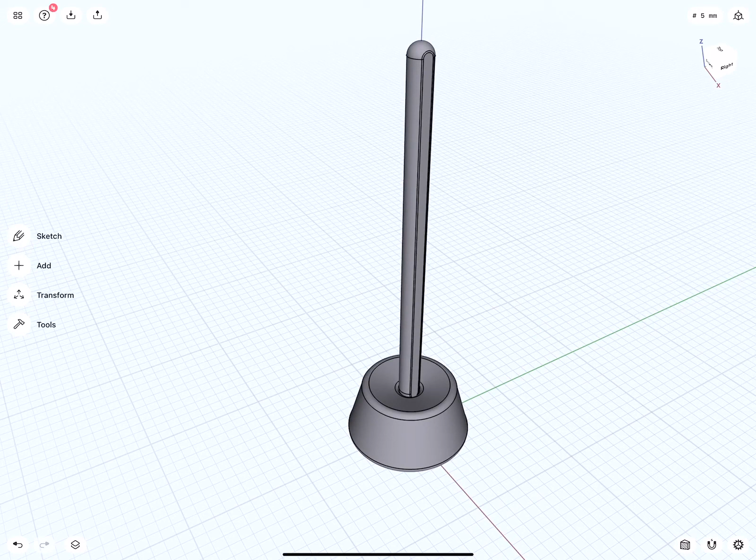Hello everybody and welcome to this tutorial on how to model a stylus and a base in Shapr3D. In this video I will show you how to create everything via minimal sketches, and then add the details only via direct modeling.

Before we get started, let's go to units, set everything to millimeters, and make sure our snapping is all turned on. We can go to the front view, zoom out, center on the grid, and we are ready to get started.

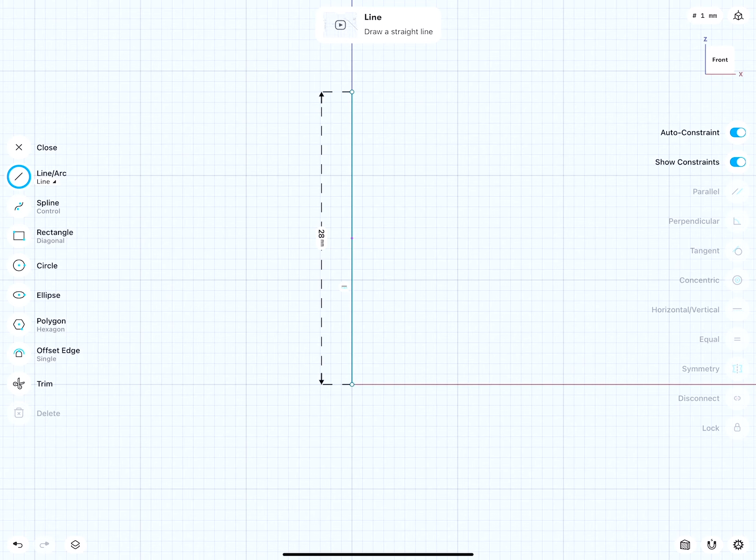Because the pencil will stand inside this holder vertically, it makes sense to start our first sketch in front view. With the pencil from the center of my scene, I will start drawing a line. I have auto constraint turned on, so when I go really horizontal or really vertical, it adds those directional constraints already.

I draw a very incorrect proportion of the shape of this pencil because now I can dimension a few elements and I don't have to scroll so much.

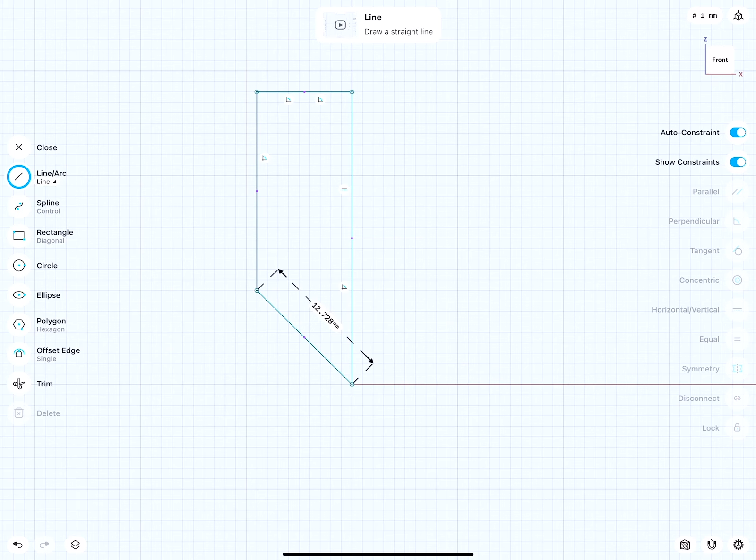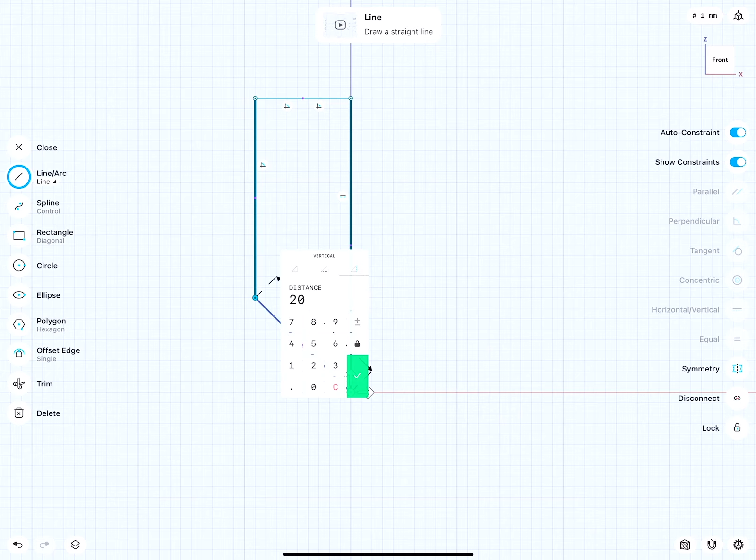So what this means is, first, this point we will lock. I don't want this to move. From here to there, vertically, the distance should be 20 millimeters. You see, there are actually three triangles: diagonal, horizontal, and vertical. There, it's a vertical dimension.

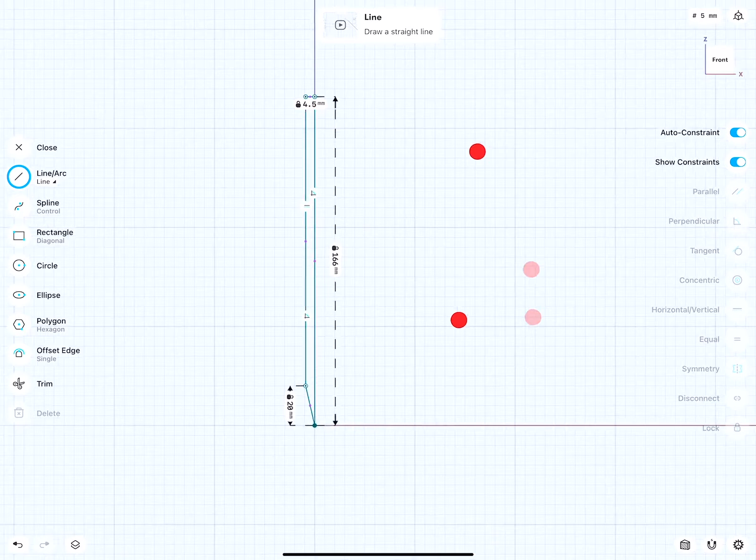The radius is 4.5. And then the length, that is 166. So you see, this way it's a lot easier to lock a lot of dimensions and details into the sketch before we have to zoom and pan a lot.

Very good. So with this very basic sketch, now we can see how this looks when we revolve it 360 degrees. This looks good.

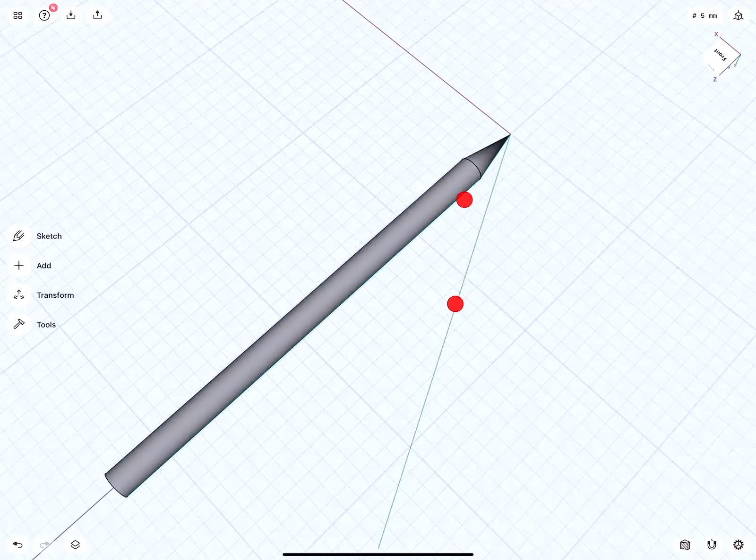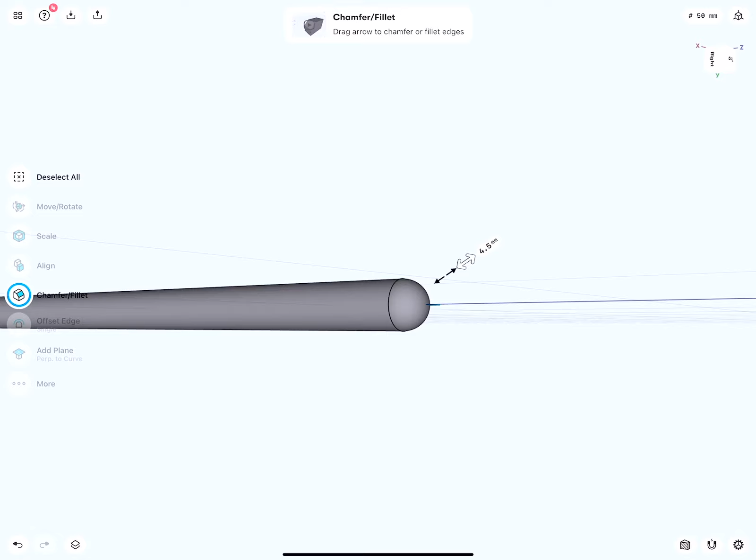This edge we can round by 4.5. Again, the diameter is 9. If I would like to round this into a half dome, it has to be half of the diameter, which is then actually the radius, so 4.5 millimeters.

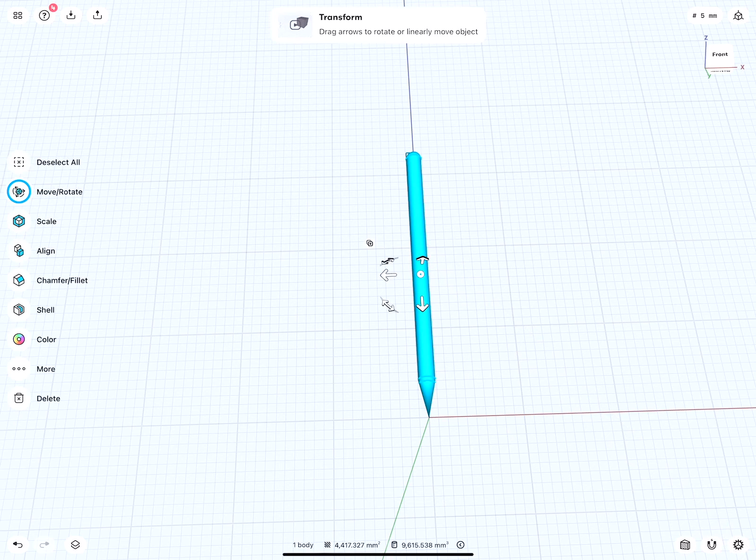Here we can round this by 10 if we would like to—not too small, not too big—but here we have a point, so that's a little bit tricky. That means this approach doesn't work. We have to modify our sketch a little bit.

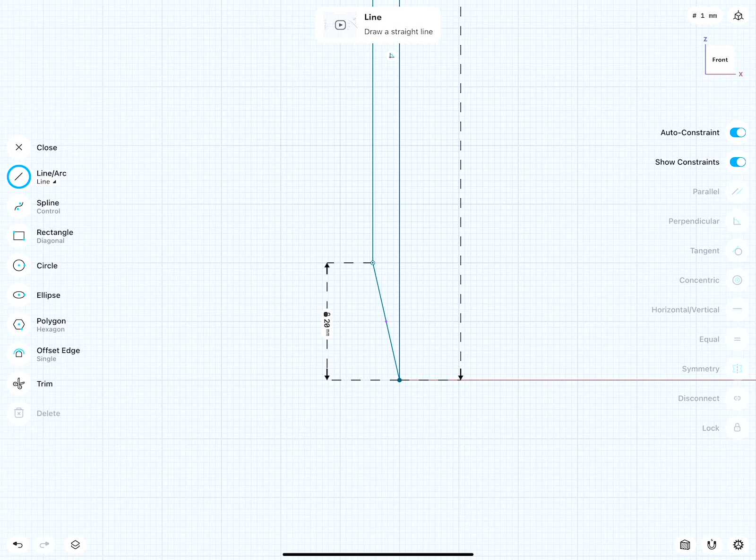Still, the top edge, so this, and then here this point, I keep as they are. Because as you saw, very easily I can add the filleting during modeling, I will keep my sketch as brutally simple as possible.

This line here I will remove and add a new line. Now from this endpoint to here, I would like to add an arc. I can go to arc, draw myself an arc to there. There it is. Very good.

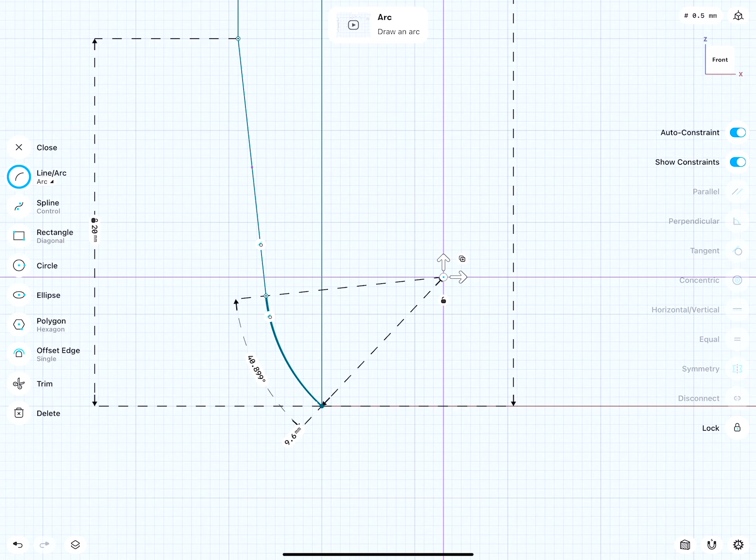The arc to this line already is tangent. If you do not see the tangent constraint, here I will remove this. We can add this here. If we would revolve this, we would have down here a very sharp point.

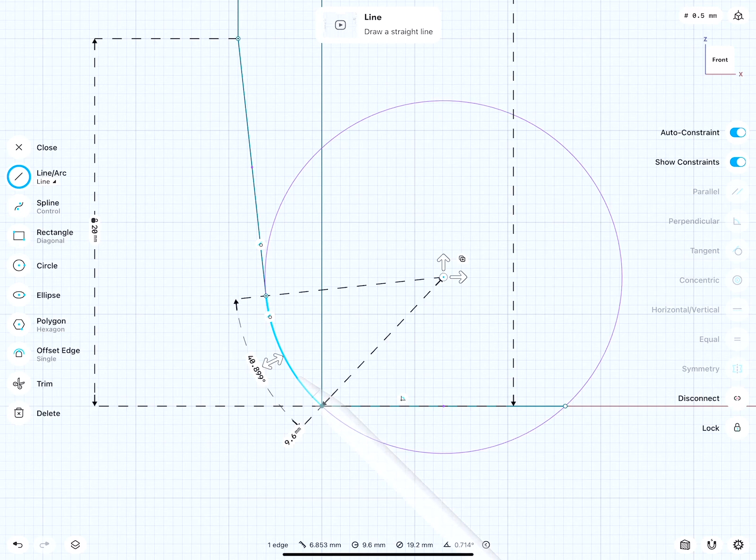How can we fix this? Well, what I want is that when this would be a horizontal line, that this arc runs tangent to there. One very easy way is I simply select this point and then drag it onto this center line here. You see? And 180 degrees.

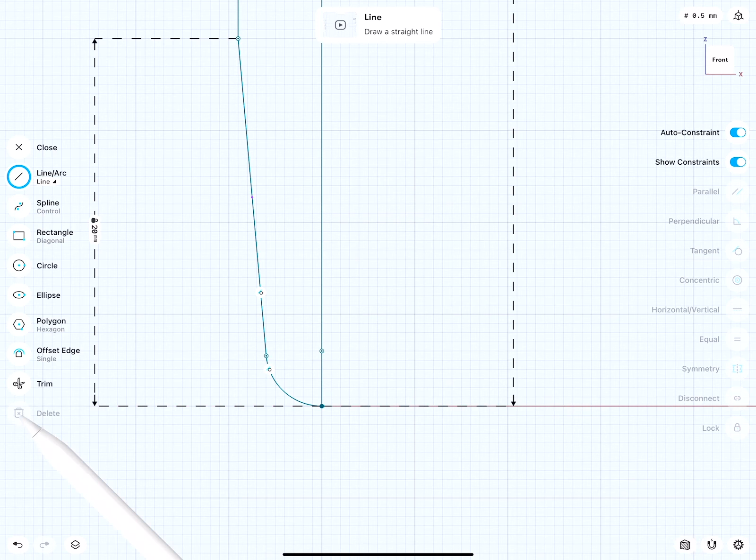So this line now I don't need anymore. And I can give this a dimension—this should be 0.75. The tip has a diameter of around 1.5 millimeters.

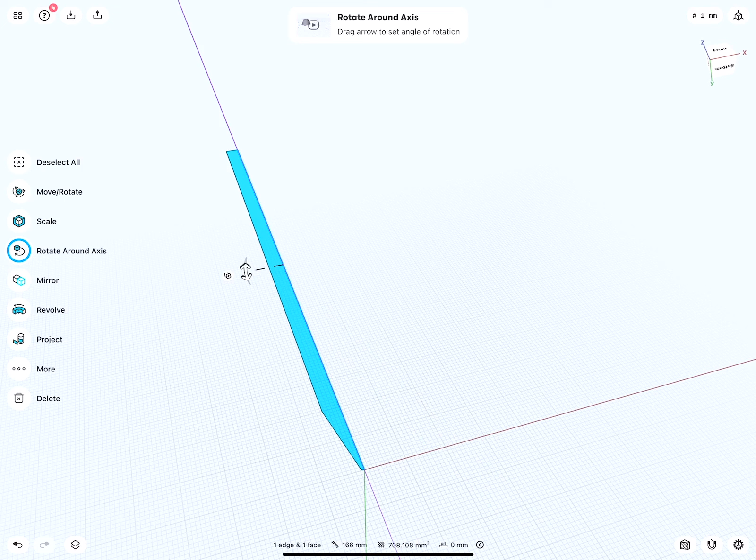Very good. So with this done, let's give this a try one more time. Profile, the center line, rotate 360 degrees, 10 and 4.5.

This looks good. When we select this, we can increase this a little bit, or not, based on how complex the shape is, even while this looks actually rather simple.

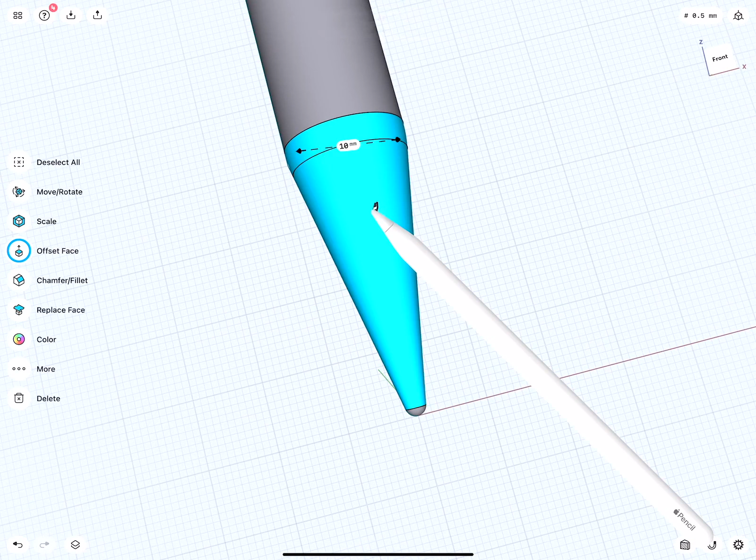Sometimes in direct modeling that is very easily possible, and if not, one very easy way is just to remove this part. We can set this to 1, so we make this 2 millimeters, and then just redo this part.

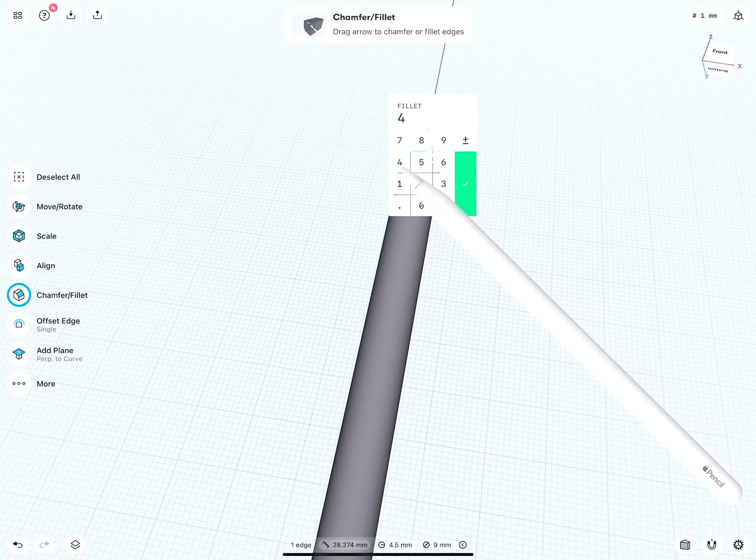So the reason why I showed this is filleting takes time. Only do fillets when most of the other stuff is done, and I can add the time in for detailing. Very good. I like this with 2 millimeters at the tip more.

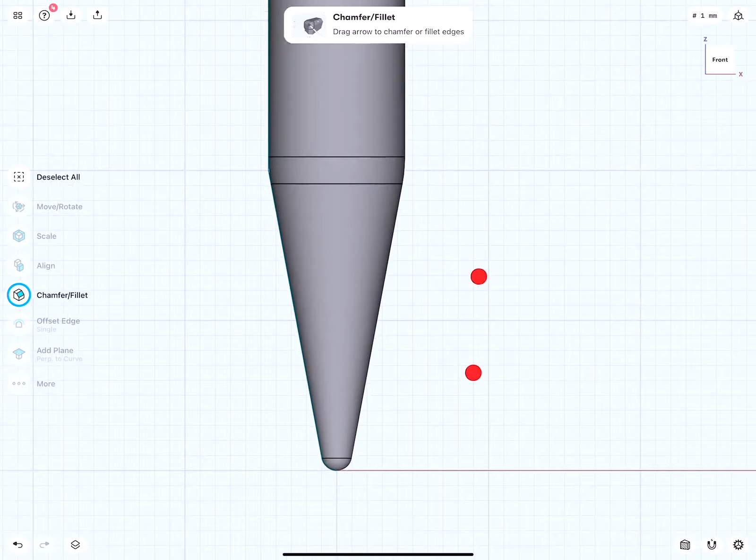And you saw also with the sketch being that simple, it wasn't really much work to recreate this. We have right here a small groove.

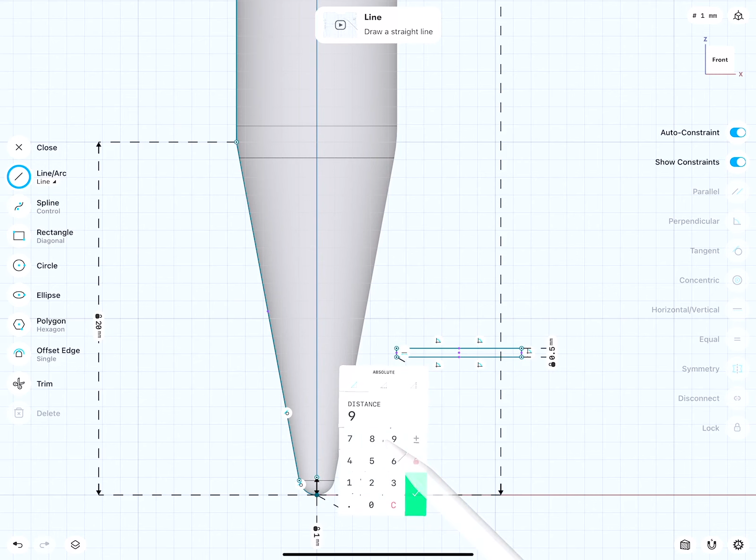So let's create a line there, there, there, and there. This should be 0.5 millimeter. From there to there, 9 millimeters, but please vertical. Okay, there we are.

And I bring this in. This is roughly 0.5 millimeter, something a millimeter in.

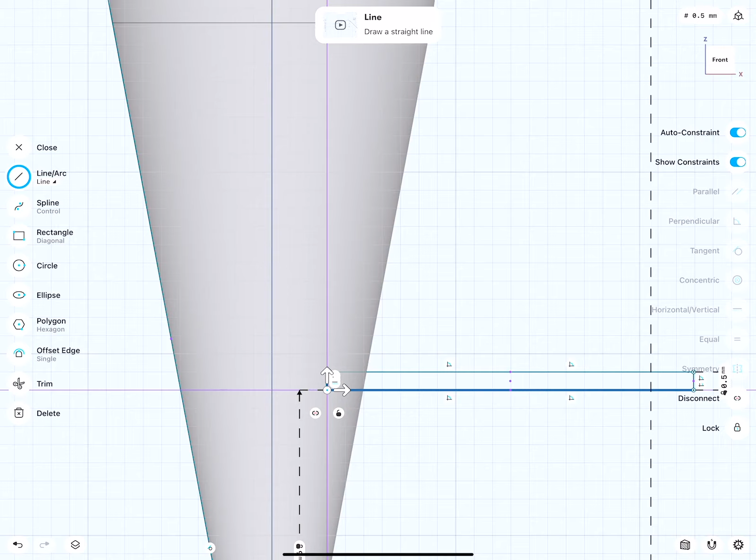I can be more precise with the sketch. The nice thing is I can now do a Revolve object, and if I do not like the result, I can either go back, edit the sketch and redo it, or simply adjust it in direct modeling. Let me show you how this works.

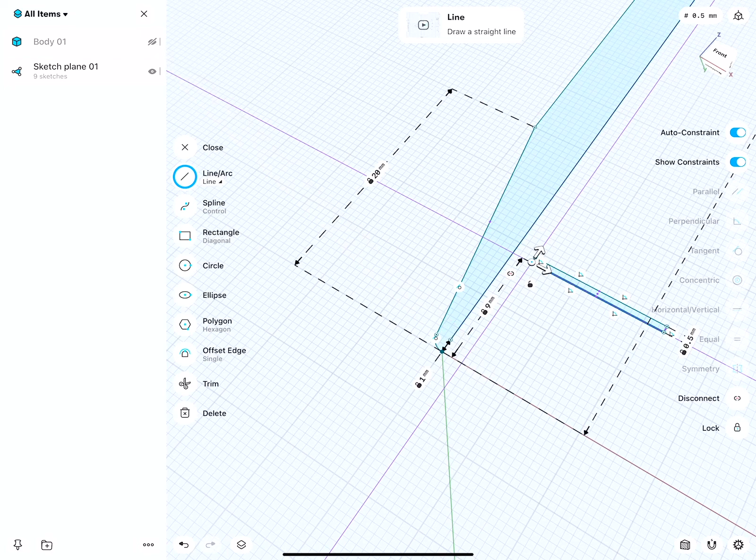We will hide this object, select this profile, select this edge, and go to Revolve. There we are. Very good.

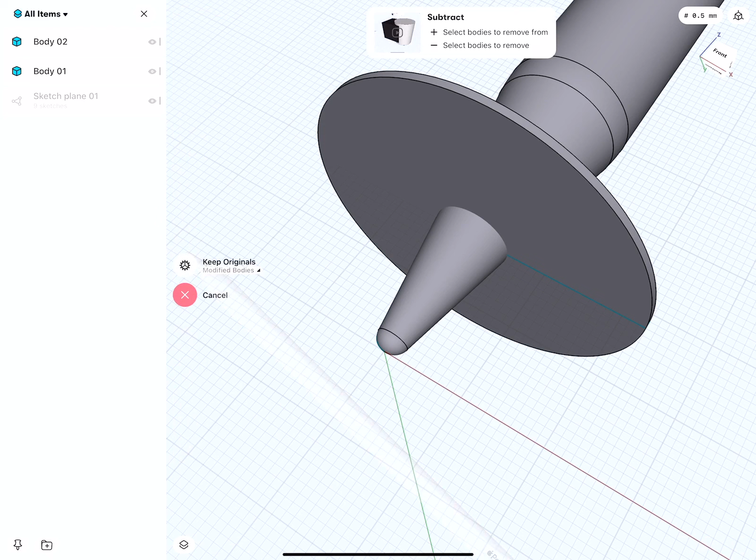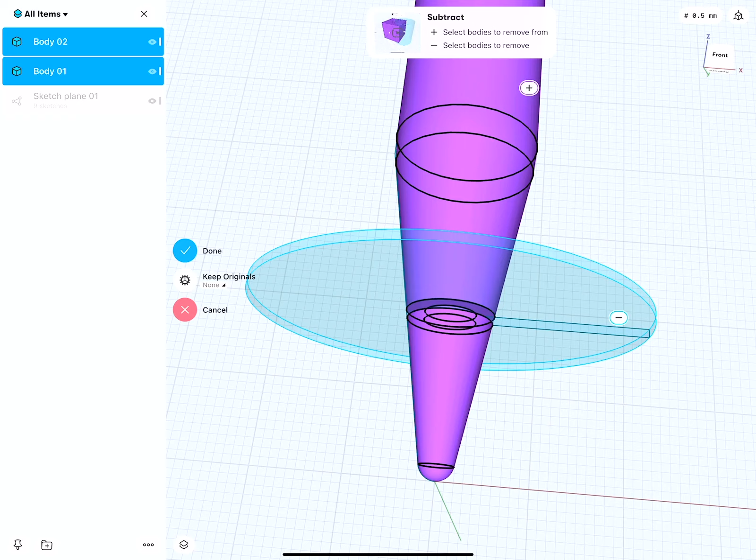I will go to Tools, then Subtract, and say from this body, please remove this one. Do I want to remove or keep anything? This cutting tool I do not want, so keep none. Done. There we are.

And I mentioned if something is not the way we want, maybe this diameter now we would like to be 2. Look how easy that is.

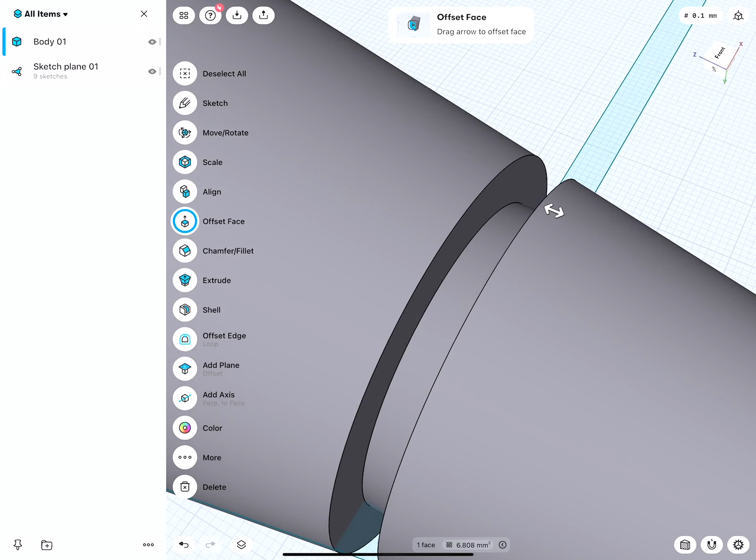Let's say this and this, these two, I would like to move by 1 millimeter. Or not. Okay.

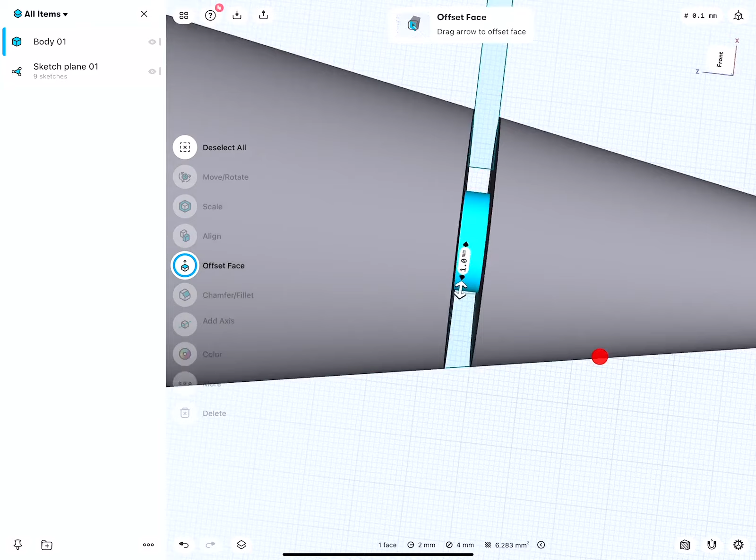And what about we make this one? This is maybe too thin, so 1.5.

Very good. So I hope you saw that the sketch was pretty much just the starting block, and then the final shape exploration I do via direct modeling.

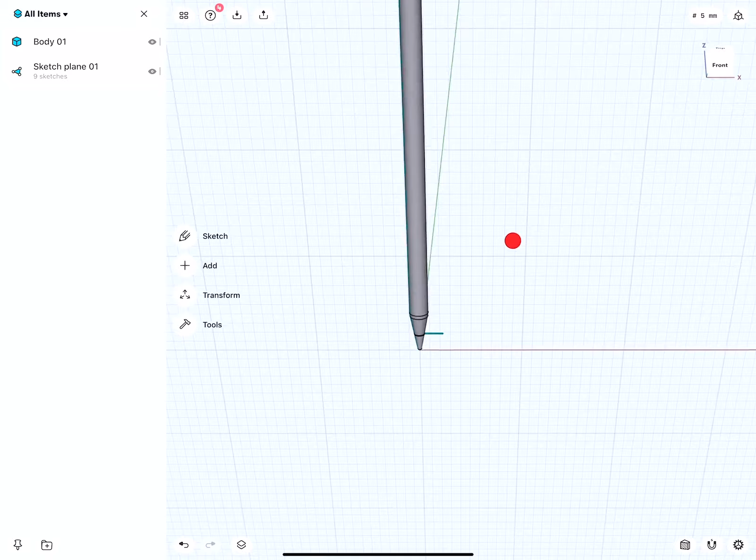One very iconic feature of this second version of the pencil is that it has a flat side. And I'll show you a little trick how we can figure this out.

So we go and hide and rename this. That's a stylus. We call this front, and hide it too. Go to sketch, circle, and I draw myself a circle here.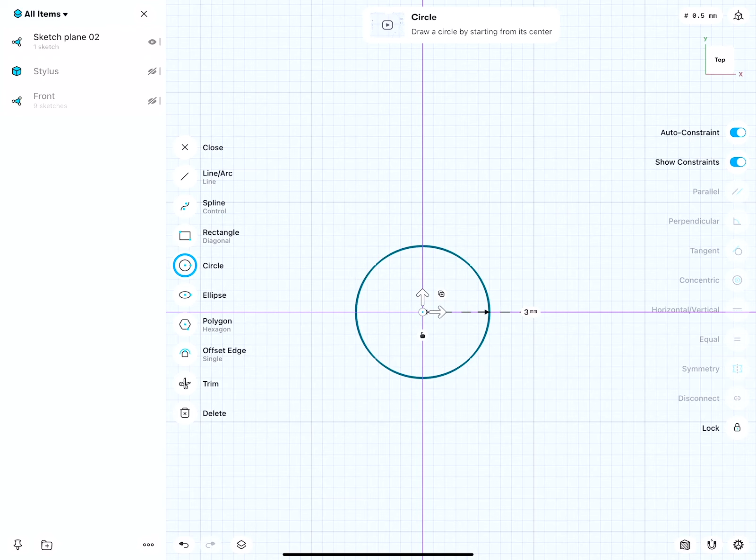The radius should be 4.5. There you see, well that's 9 millimeters. So I kind of have a top view of my geometry now.

Then I can draw a line there and there and there and make a box. Very good.

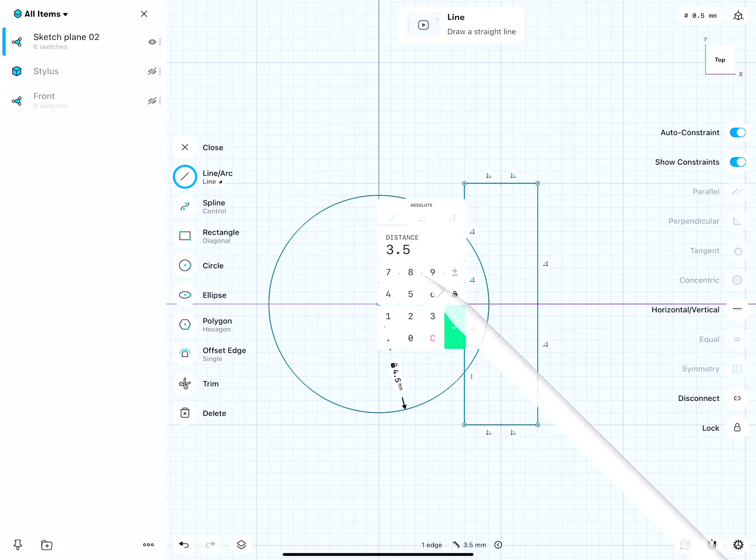Draw a line from the center point to the midpoint there. This point I will lock. Here's my radius, let's call this 4. And there you see that this tiny distance is 0.5 millimeter.

That's perfect. So this circle now I can remove, I don't really need it anymore.

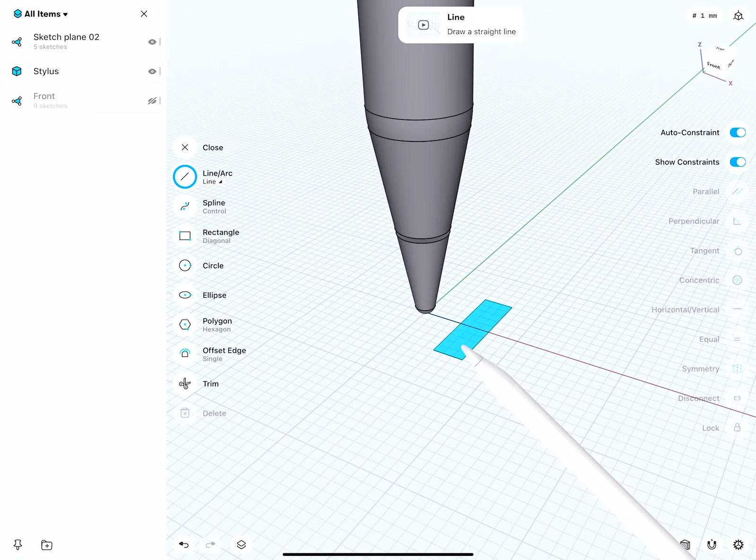Let's take a look at this sketch from a perspective view. Select it and extrude it through the whole object. There we are. Beautiful.

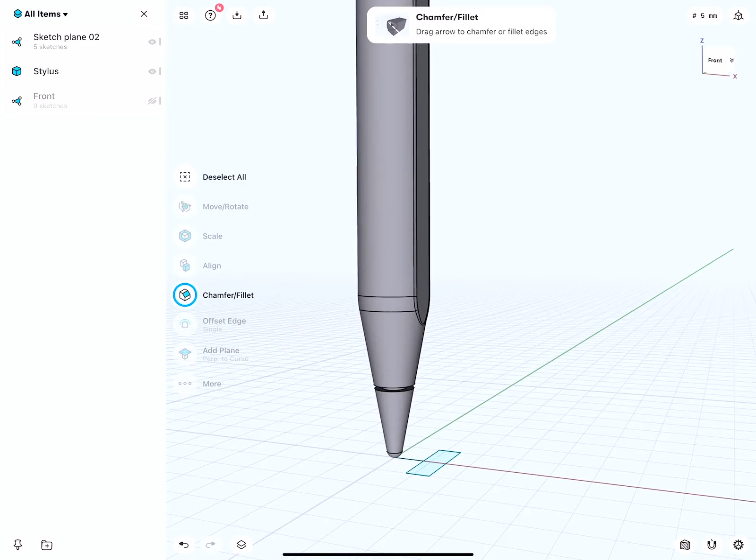A small rounding to make it nice and comfortable. And there we are. We can do the same here. Very good, so the stylus is done.

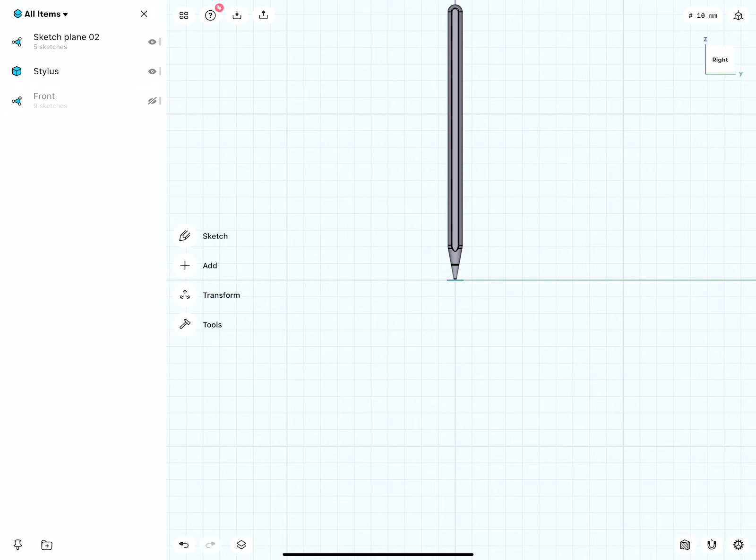Now, based on this, how can we very quickly create also a base which we could then 3D print? I will call this first 'Stylus trim', or simply use a name that makes sense.

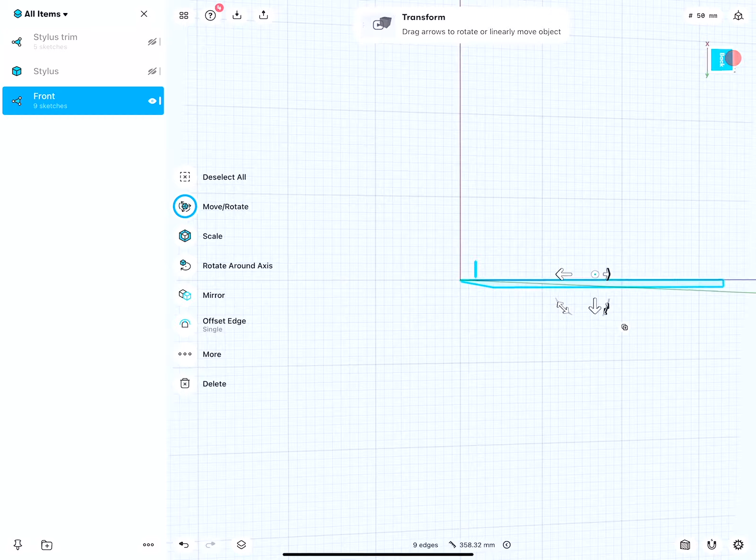This is my front sketch, and right now I'm looking at the side. So best would be to go to the back view or the front view. There we are.

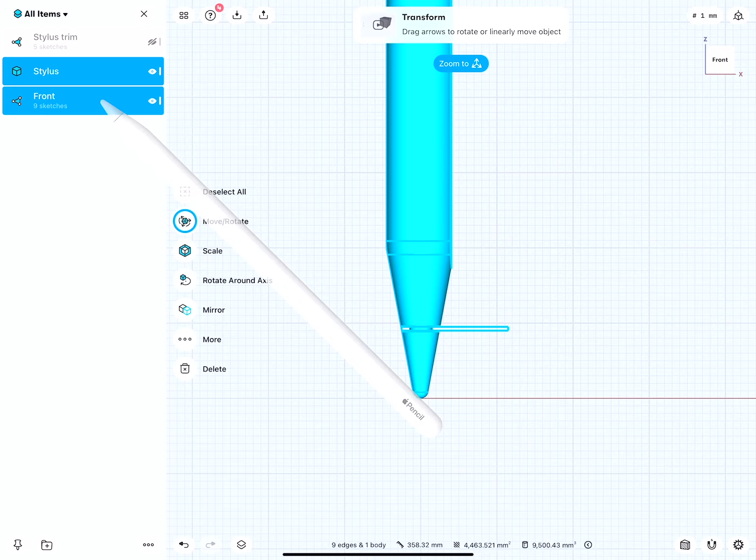I will select everything. Actually, no, I will not select everything. The stylus, this I do not need. Here and here, this I will select and then move everything up by 4 millimeters. 4 is sufficient. Okay, very good.

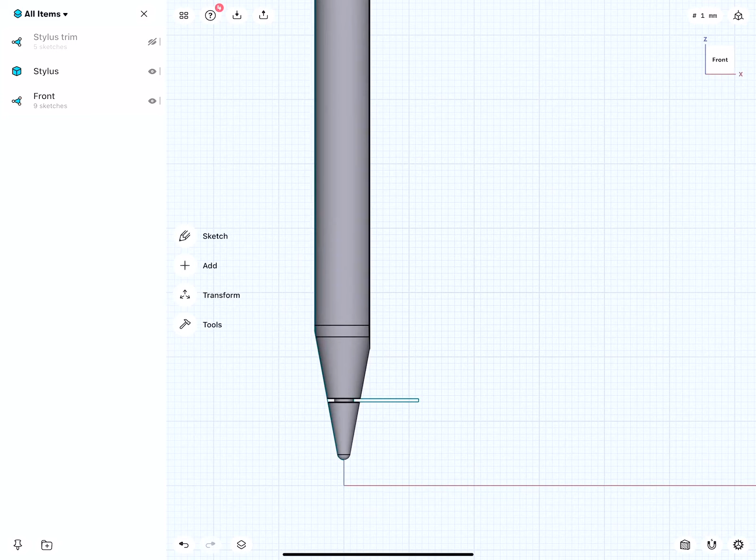Then I can hide this one more time. So why did I do this? When I make myself a base where I then put the stylus in, I do not want the tip to touch the ground, which is why there is 1 millimeter of space.

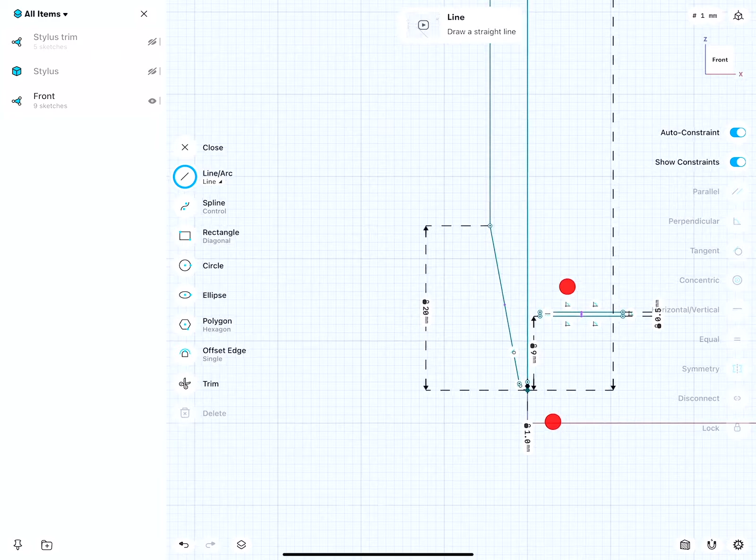Okay, now to create the rest, that is super easy. I select this. Can I move this? No, this was good, I just wanted to check it, which means here is the grid.

I can draw 2 millimeters over and then from there draw a line straight up. There we are. This line I can delete, this was just a helper. This point I lock so I can't move it.

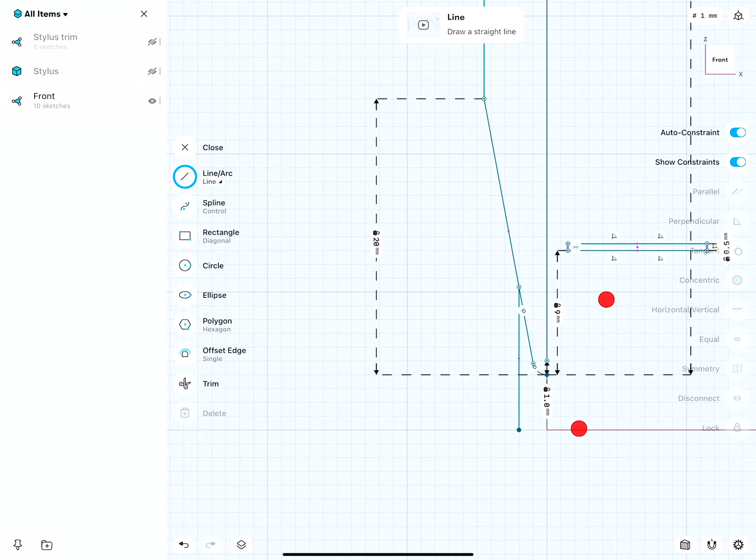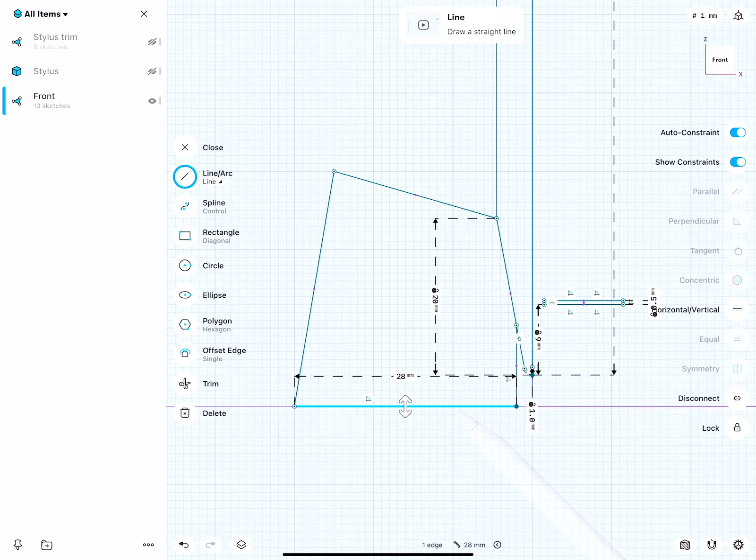Then I draw a line here and a line from there going to there. This line I will specify as 25 millimeters. And this point to here vertically, this should be 28 millimeters.

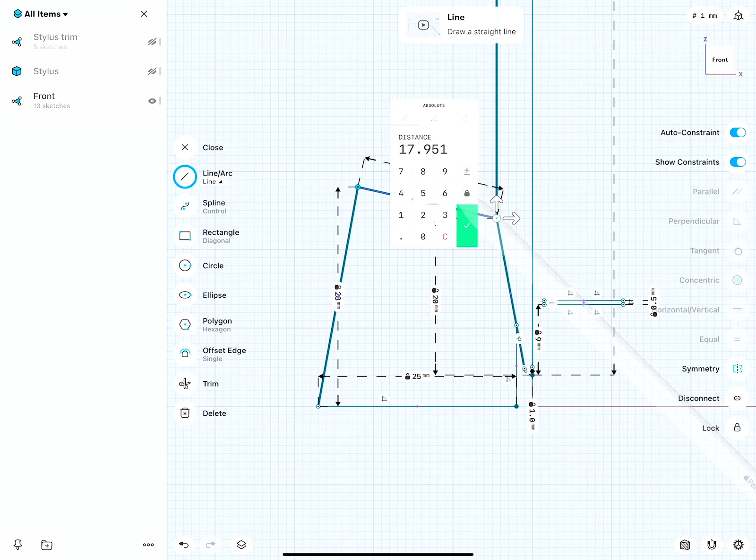Very nice. And this to here horizontally, let's make this 15. There you see, I have some basic dimensions.

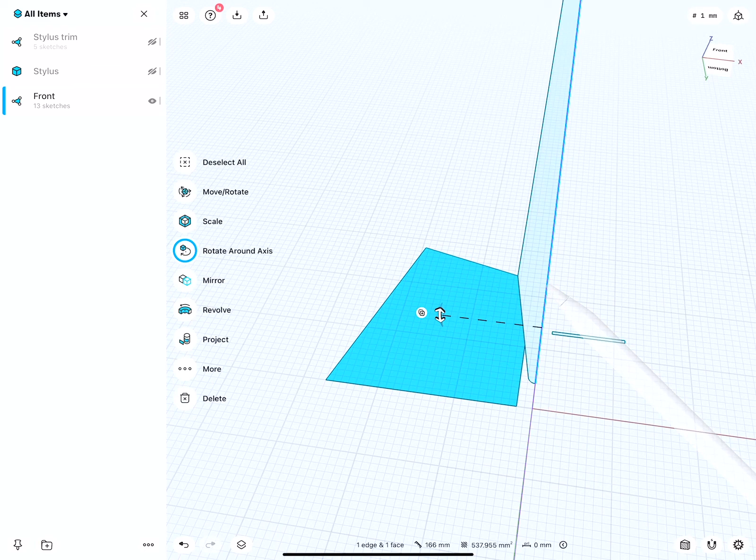Okay, also here I work only with a very, very basic sketch, I don't need really much more. So this, I will select the center line of the pencil, sketch, revolve.

There we are, cool. So this is actually now a block the stylus could rest in. But it's not very interesting, so let's detail this a little bit more.

This edge we will round 5 millimeters, so it's very easy to insert the tip.

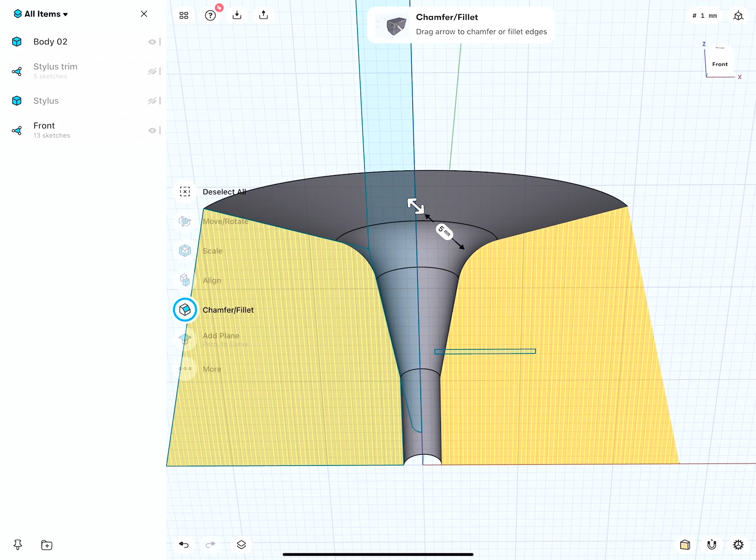Let's turn on cut section view so I can see how far and proportionally, for example, how big proportionally this fillet is. When I then insert my stylus, okay, now how stable is it? Maybe 5 millimeters is in this case a tick too much.

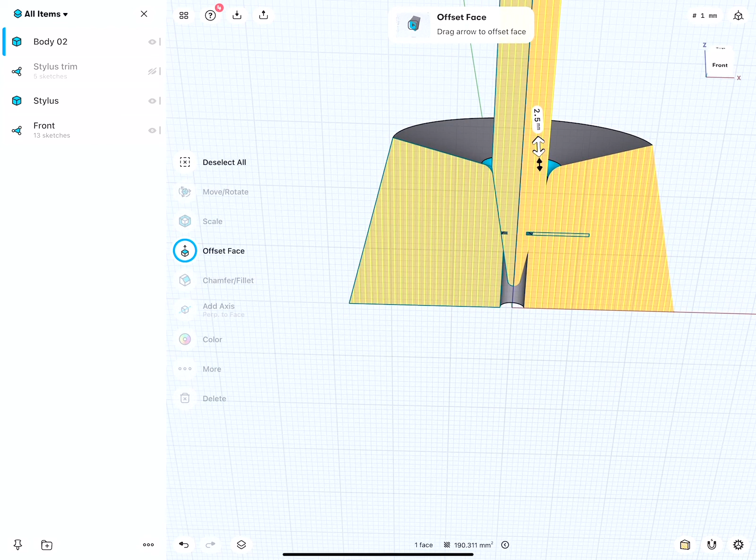2.5 is better. The stylus still easily can slide in because I have a rounded edge, and it offers more support since I have a bigger flat surface that will be flush with the tip of the stylus.

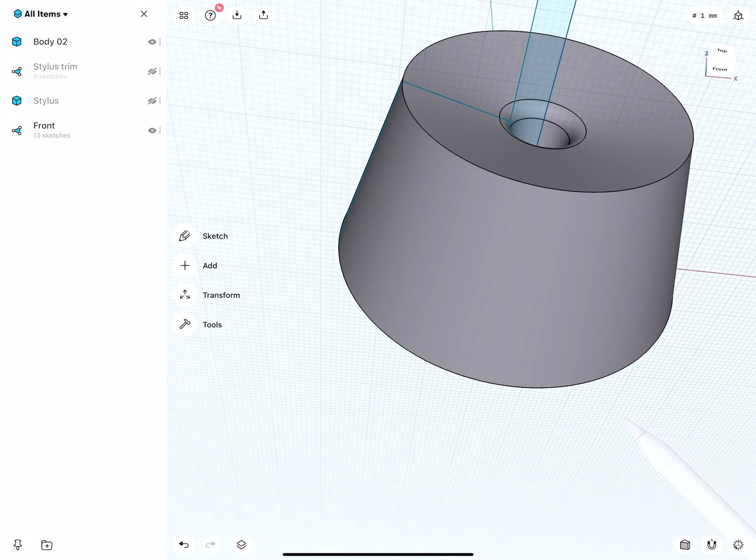Very good. So this edge here we will select. Now we round it by the same value. Let's make this consistent. 2.5. Very good. And also here 2.5 at the bottom.

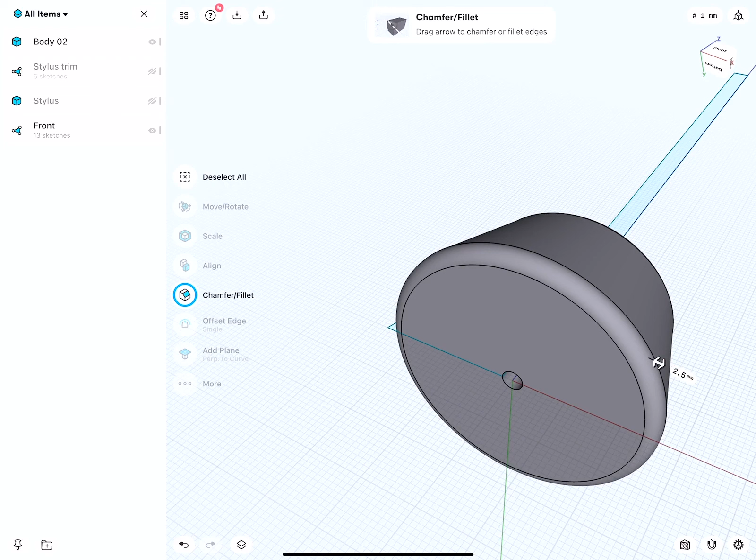To core this now out, we can select this bottom face, then we go to shell, and based on my 3D printer and how thick everything should be, how wide is my nozzle, I can specify a wall thickness. I will go with 1 millimeter here. Very good.

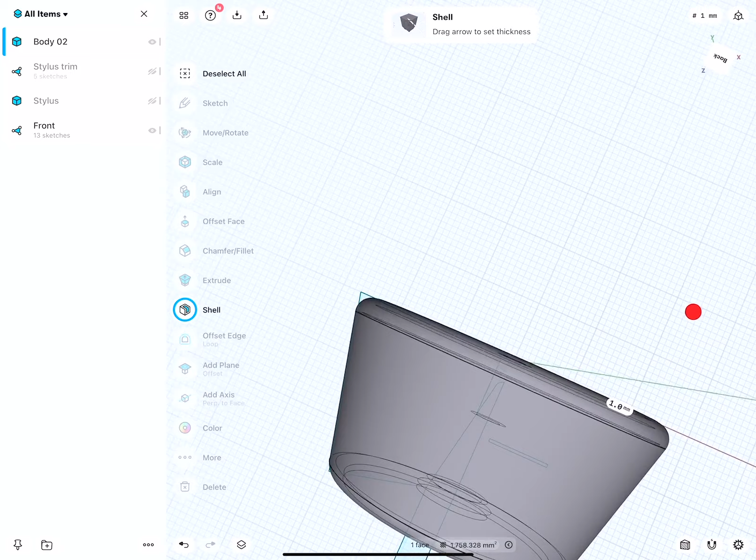This looks fine. Let's go again to a cut section view. Man, this actually looks visually pleasing. So we have a rounded corner at the bottom, rounded corner on top. Here, actually, we do not have a rounded corner.

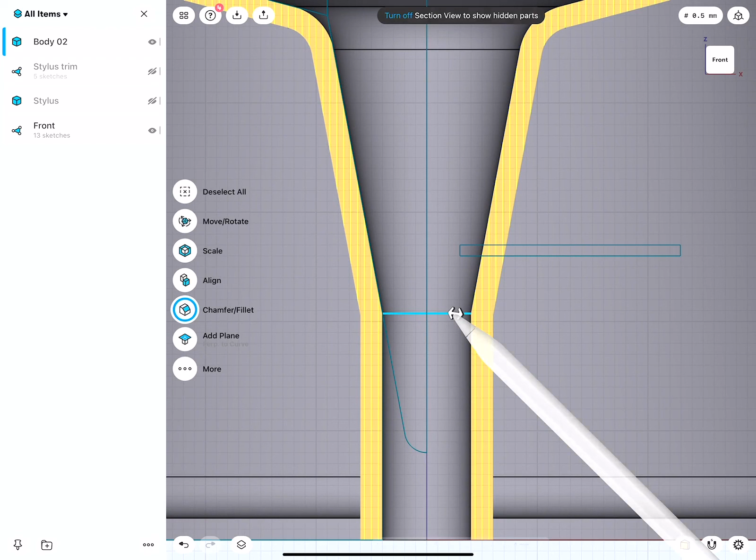We can round this after, but this is actually not ideal to do it now because you see we changed the material thickness. So I will go back before I did the shelling.

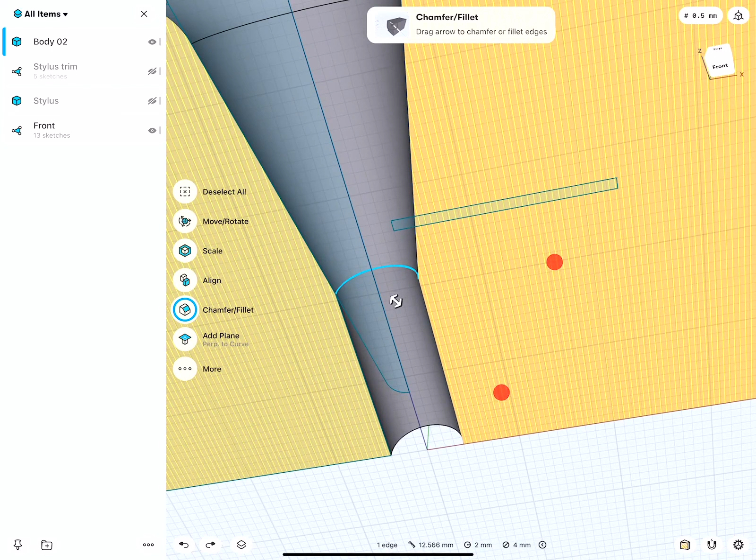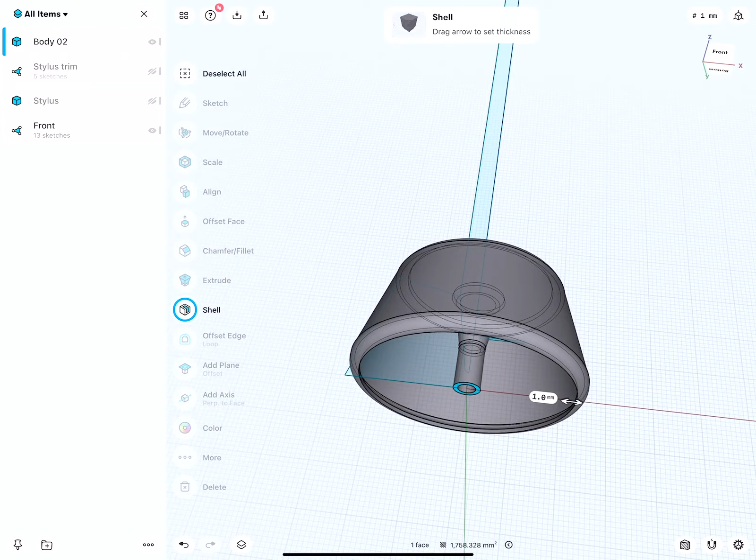Round this a little bit. Okay, and now I can go ahead and shell this. Yeah, this looks good. Very nice.

I went back to the cut section view. I'm curious, so here we have a surface. What happens when I push this? Okay, so this goes up a little bit.

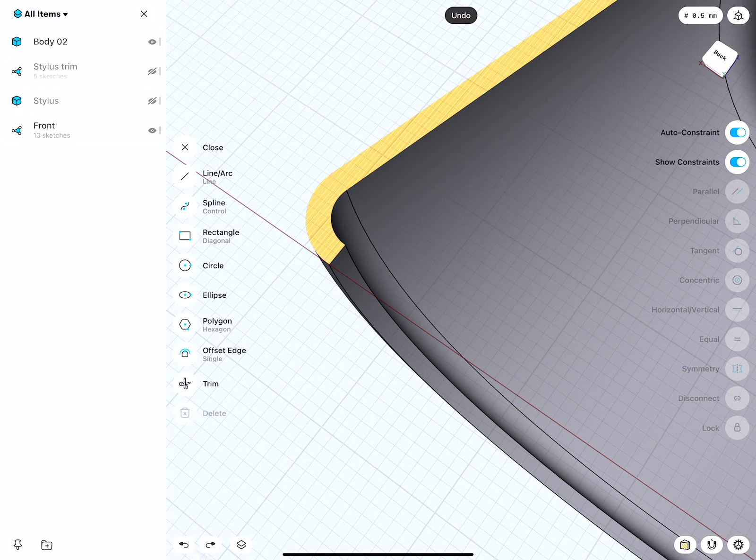I would maybe like to have a little bit of a straight connection there. How could we do this? That's kind of like what I'm trying to figure out.

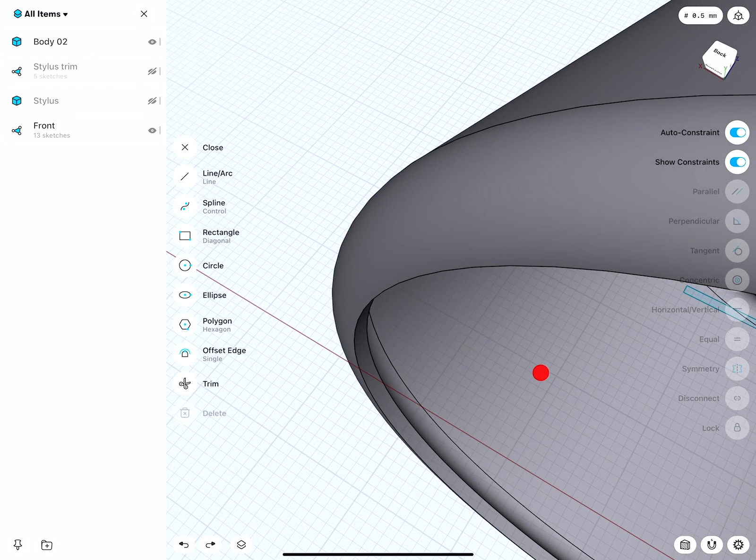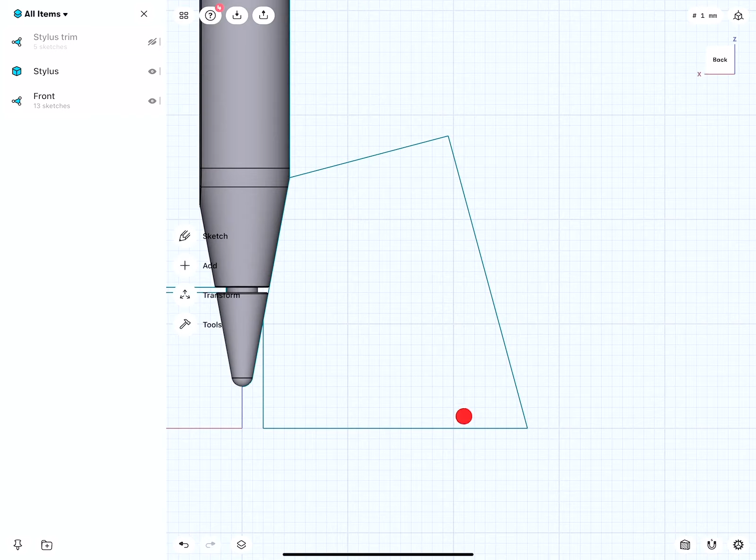So we will do the following. Go a few steps back. Take a look at our sketch here. Okay, so there we are. So I can select this and then revolve it around this one.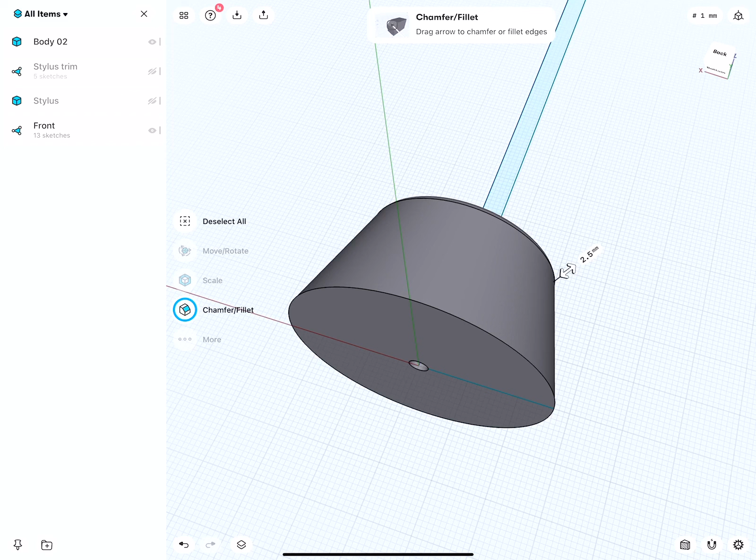So there we are. And then we set these two, we fillet by 2.5, but then at the end here at the bottom, I would like this to go in a little bit more. So I'm not going to fillet this edge right now. So I keep this. I'm showing you the process of how I would try to solve the problem of modeling step by step.

So when I open the complete bottom part, then I will end up with a material thickness like this by 1 millimeter. Yeah, and then later I could just draw myself a new object that would go in there this way. Okay, that should do it.

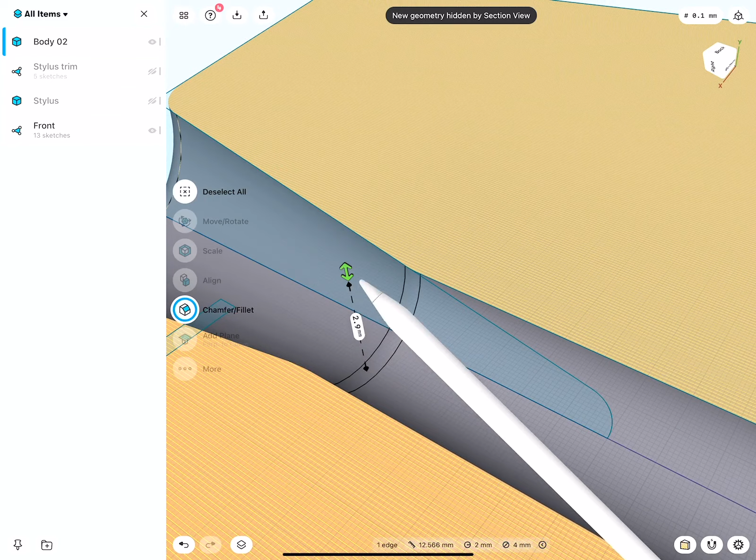Let's figure this out. So cut section view here. Let's round this. Very nice. And this is all done.

We will now open it from the bottom, shell it by 2 millimeters. I go with 2, so it's a little bit thicker, easier to see. Very good. There we are.

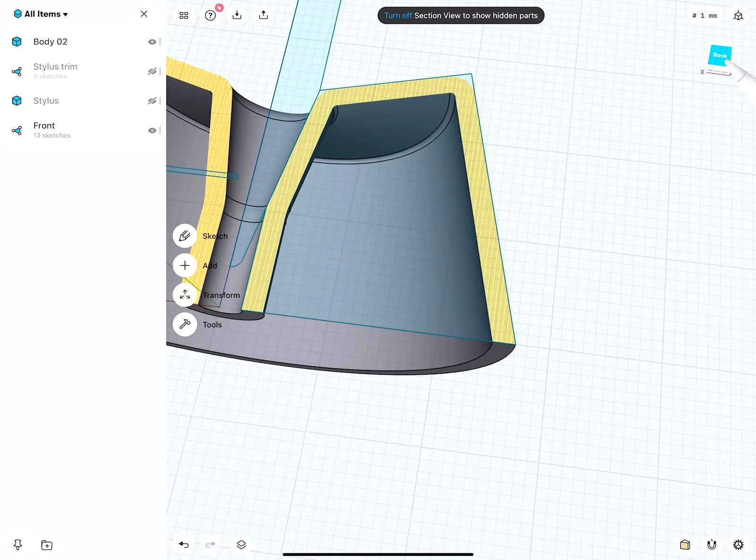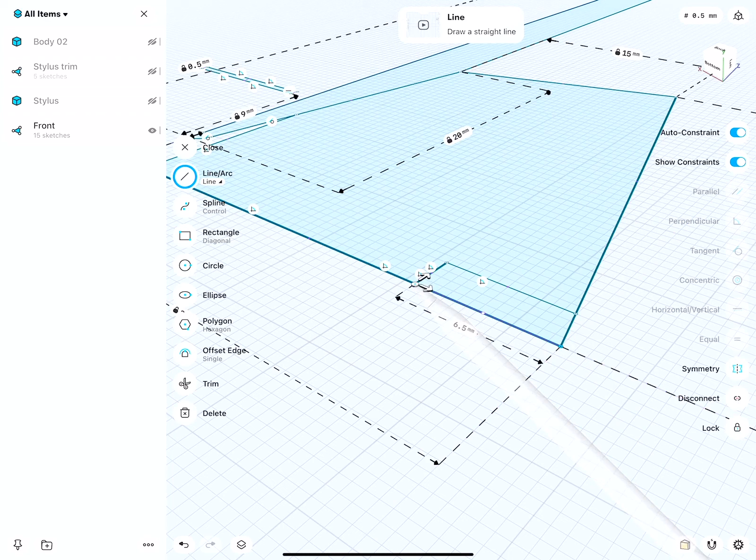Then we can hide it. Draw a line, and this should be 2. Bring this over. I just connect it and then specify the distance. What should this be? 4 millimeters.

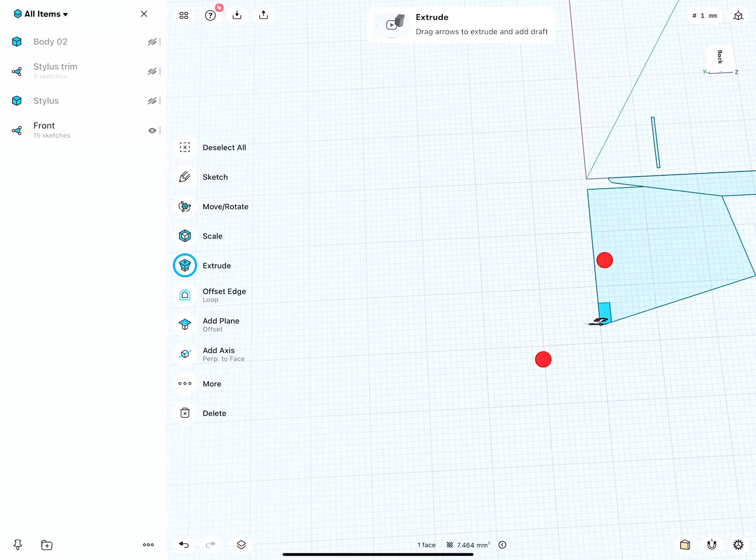Okay, then this profile I will revolve around this axis. There we are.

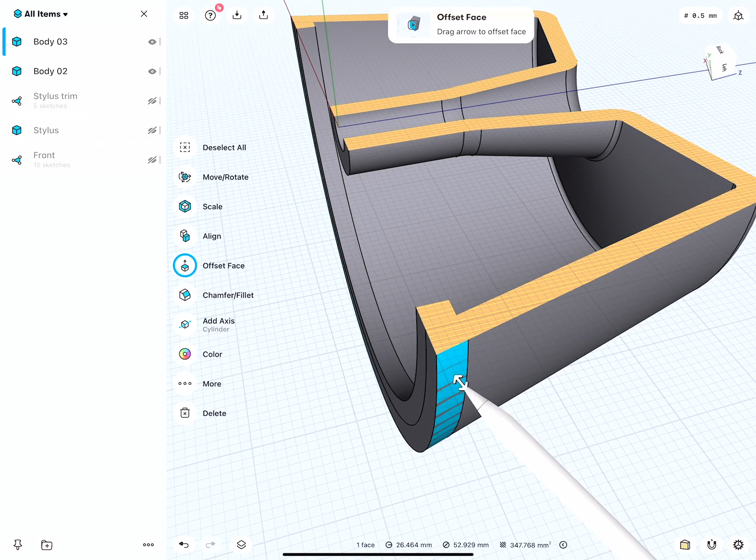Show my other element. I will hide the sketches. And you see on here, the faces overlap perfectly. So I will move this in just a little bit. There. And then select this and this. We join this together into one.

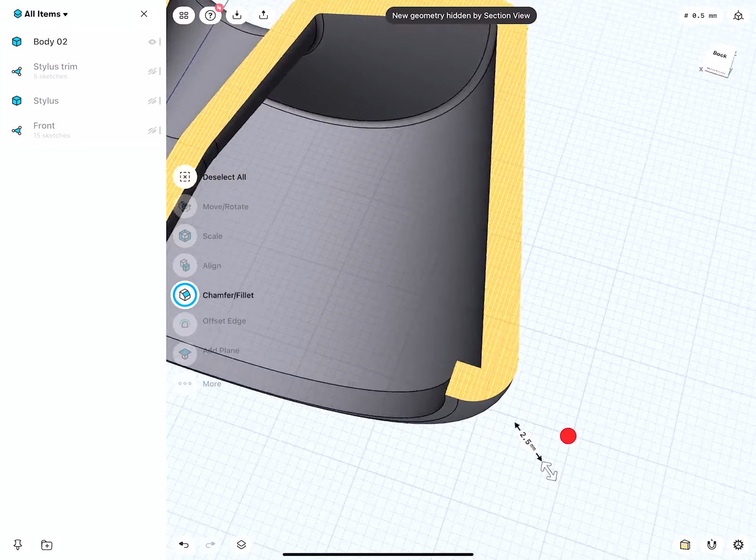Very nice. So you see how I built this step. And now I can go ahead and fillet this one. This is actually now too small, as we see. Not a big deal. Well, because this is a flat revolve, we can make this smaller or bigger as needed.

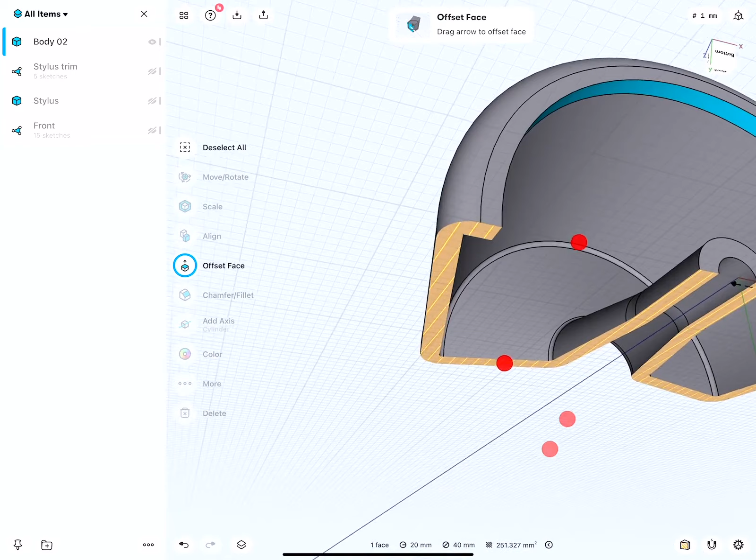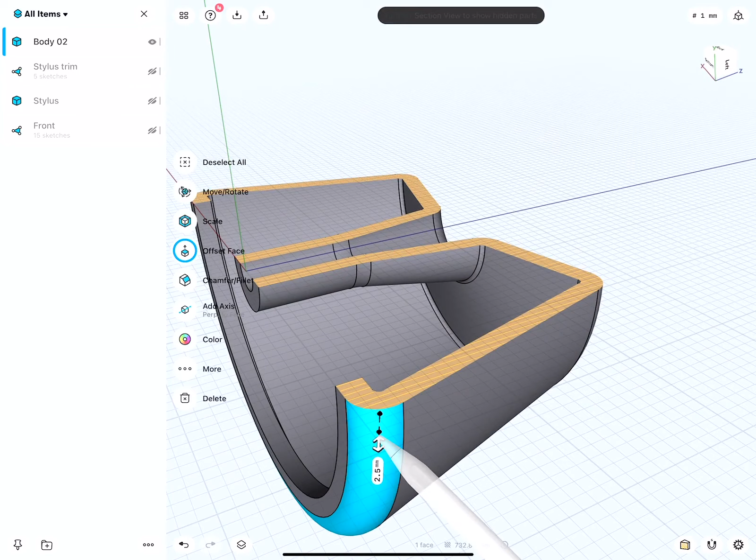So when this is 2.5, yeah, so this has to be a 0.5 fillet. Because outer edge or outer fillet is 2.5 minus material thickness, which is 2, is 0.5. So this needs to be 0.5 millimeters.

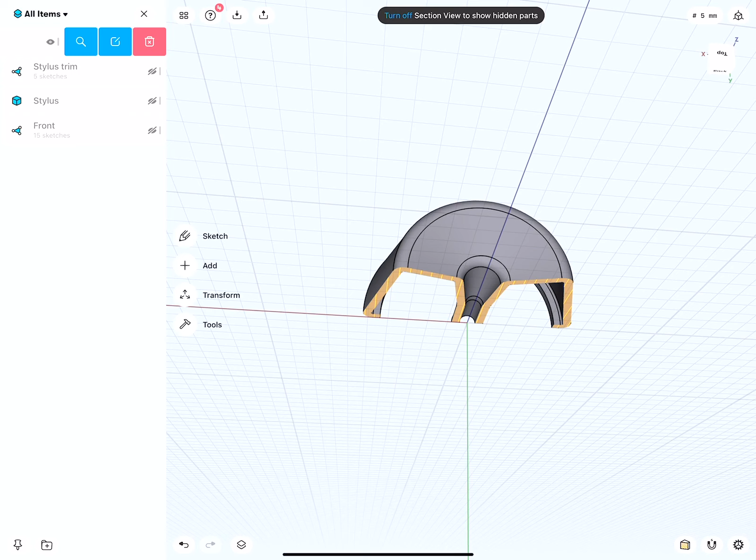Yeah, there it is. Okay, very good. We can call this simply base. And this is now ready to be printed.

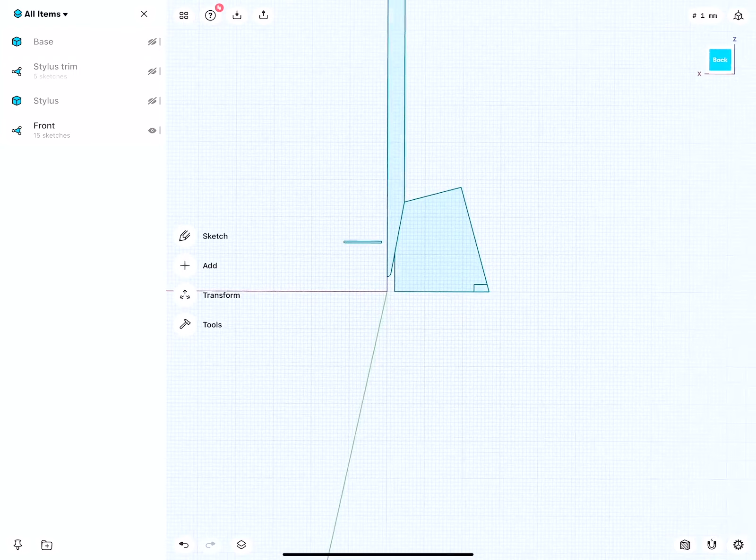Because of the based on the machine and how this angle is, we might need to adjust the angle of how this and this relates. Maybe this point has to be moved up a little bit more. Or we simply put a support under it, then we can print it very easily.

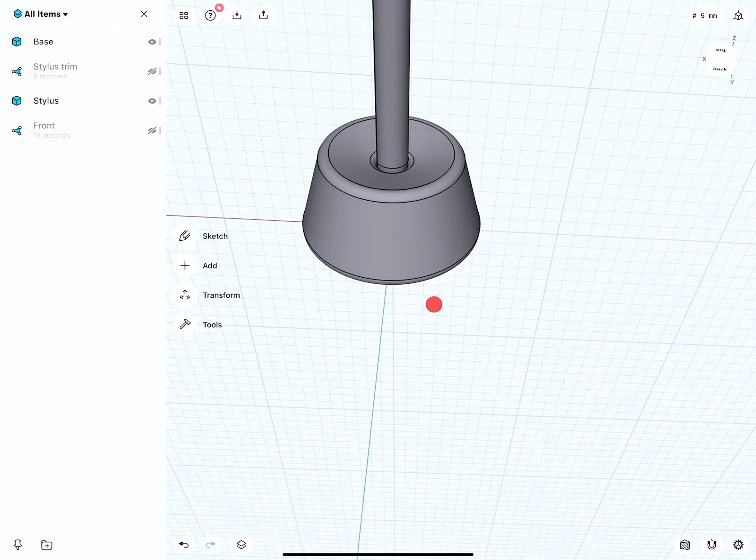Otherwise, this is now a base which we can put onto a 3D printer, and then we have a very nice place where we could always put our pencil to.